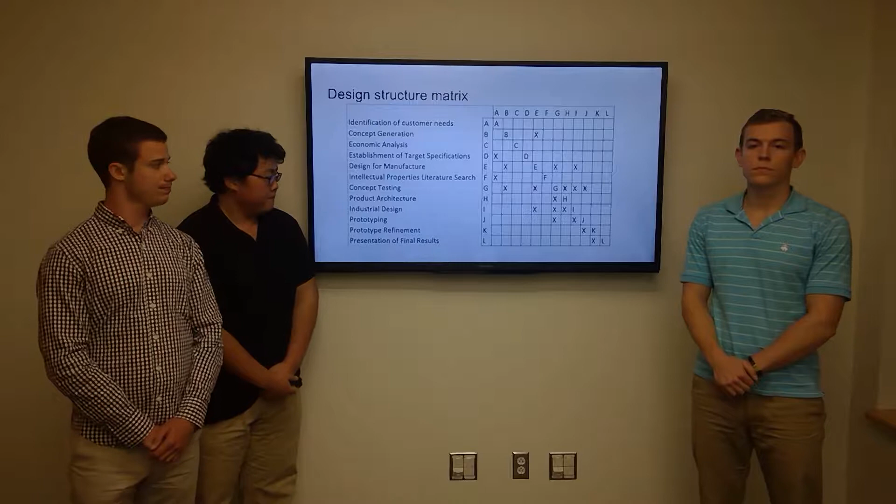And station 2, we got the idea to create sort of like a Plinko machine. And none of these ideas had any legal repercussions because many of the patents had expired already, and the other patents that had not expired yet, we didn't use any ideas from them.

For each station, there were 3 ideas that were generated. The first station, gravitation, had an Arduino-powered fan that would raise a ping pong ball up and down. Magnetic force, where the user would use a magnet to guide a metal ball triggered by the ping pong ball through the course. And then the third and final idea for station 1 was projectile motion, where we would use a catapult to launch it onto the next part of the track.

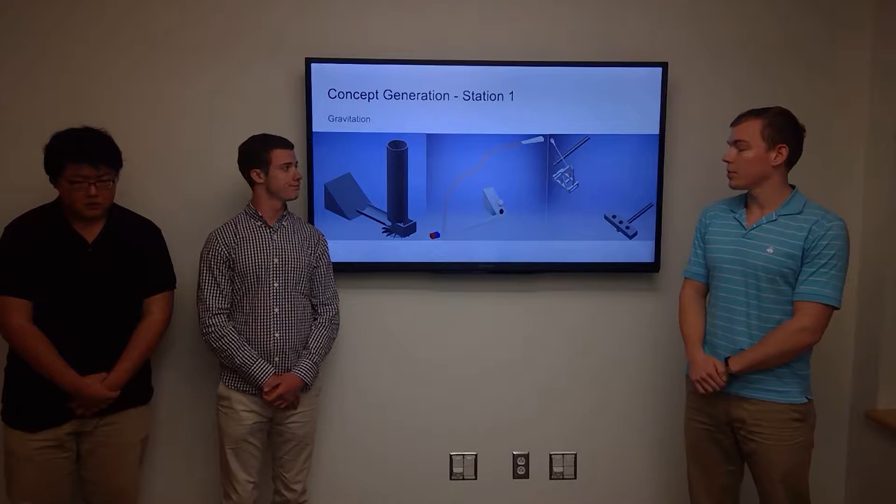The team has decided to pursue magnetic force because it had the most repeatability by the user. So as the metal ball rolls down, the user will actually guide it with the magnet. And if the user pulls too far away, then gravity will win and it will drop the ball and roll back to the starting location.

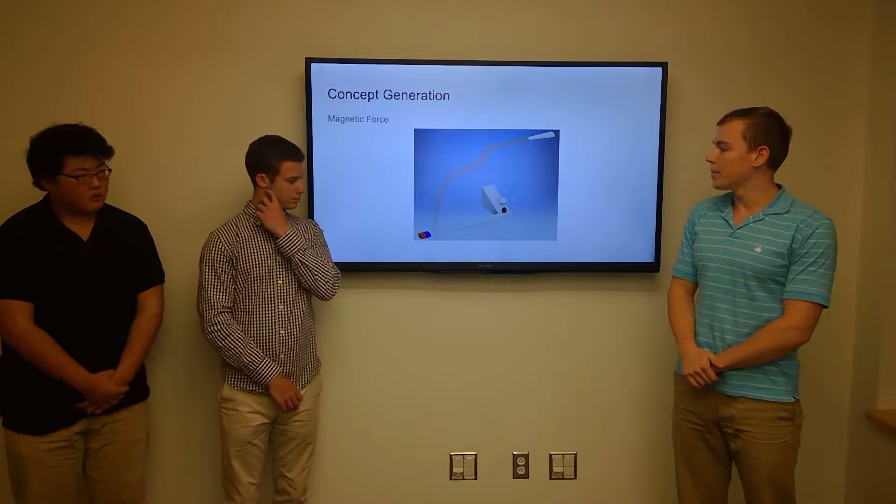We were finding issues, especially with projectile motion, being able to get that repeatability. And this station also offered an additional teaching concept with magnets that we thought was an added bonus to the teachers being able to teach first graders about magnets.

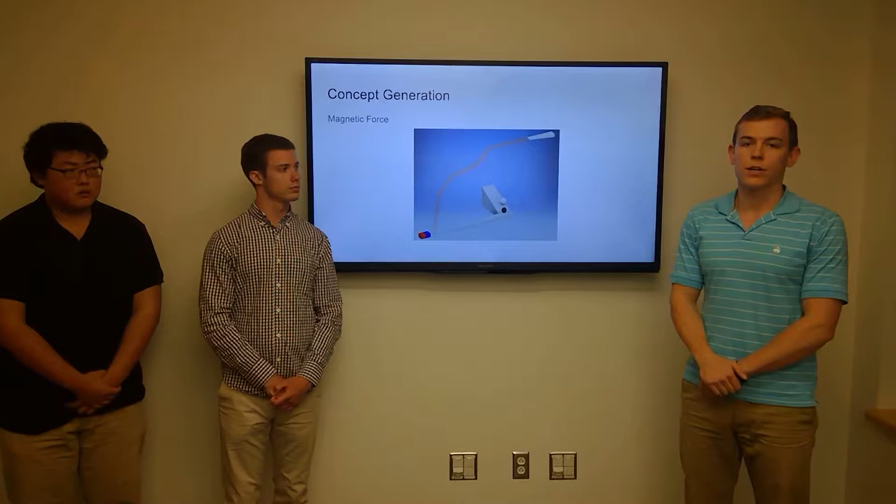For station 2, we were looking at addition. The first idea for this was using Wheel of Fortune, and the second was a pegboard, and then the third and final was a random number generator.

Each idea generated different numbers where the user would then need to add them together, and then the teacher would be able to enter them into the Arduino, and upon getting the correct answer, a gate would open and then the ping pong ball would continue through.

And the first station would get those numbers by the ping pong ball rolling through and spinning around the wheel. The second one would be activated where a lever would pop up, releasing ping pong ball through the pegboard. And then the third one the ping pong ball would roll through, and then as it passed different signals, that would be able to alert the Arduino to generate different numbers for the user to, again, input.

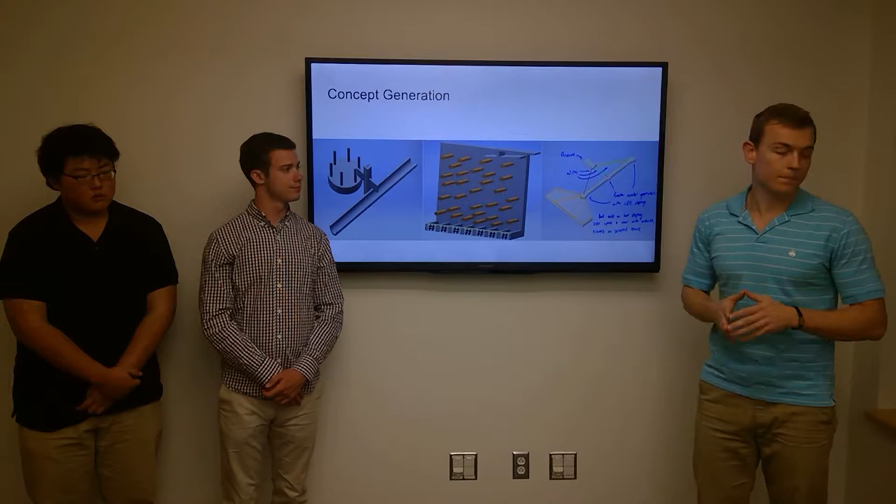The team has decided to pursue the pegboard. This really connected well with our first station. The magnetic ball, as it reached the top of that station, would drop into a 3D part that we'll explain later, and that will raise a lever, releasing those ping pong balls.

And then we just really liked how easy that went with station 1. In addition, it also added a lot of excitement and was aesthetically pleasing to the user, which was great for first graders. It really kept them engaged, and we'll get them excited about this station.

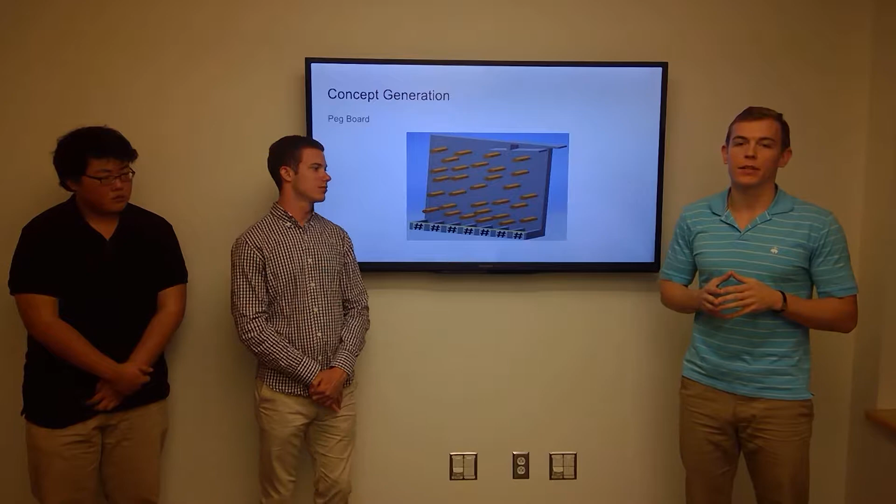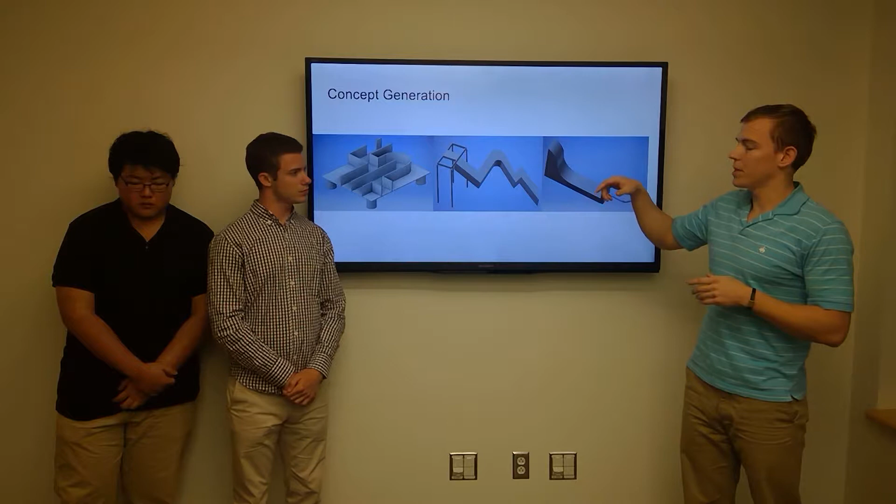For station 3, we were teaching motion, and the 3 ideas was a maze, a ramp, and then a slide. The first idea, the user would be able to pick it up and guide the ball through the maze. The second idea, the ball would be rolling in after station 2 and trace the different types of motion needed

to end the ramp. And then the third idea was the user would blow through a straw and it would raise the ball up, looking at different motion. It was going up and then bending around a ramp as well.

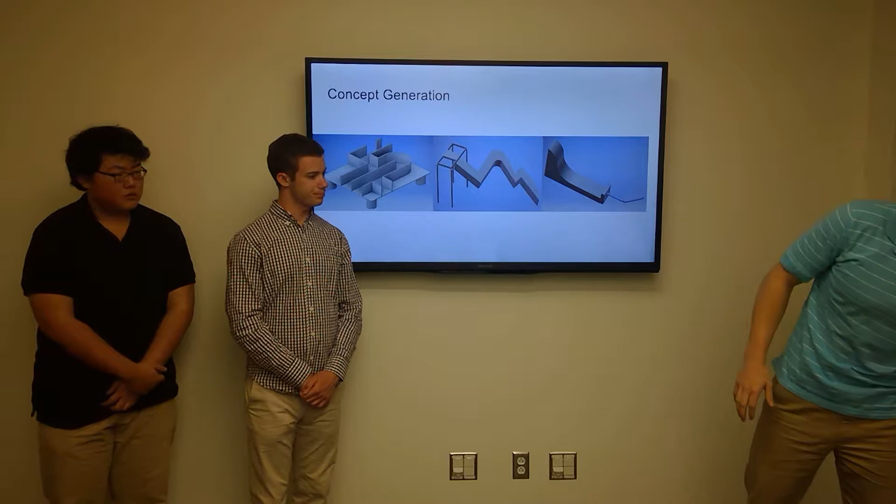The team has decided to combine two of these ideas, both the maze and the ramp. The purpose of this is to add more motion and better teach the concept of different movements and different angles and direction. It also will allow the ping pong ball to reach the desired maximum speed or the desired exit speed for the BRG.

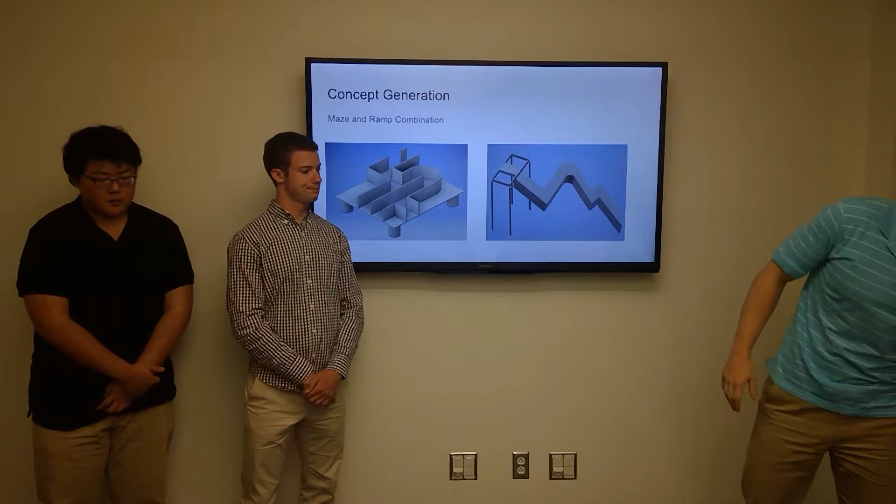We also performed a failure modes and effects analysis on these stations that we built. The only imminent danger is in station 1, where there's a magnetic ball used to go up the ramp. This could pose a slight issue if someone has a pacemaker, since it might have some magnetic interaction with the pacemaker and make it beat off beat. This shouldn't be a huge issue though, since it would be super rare - most people don't have pacemakers, and most pacemakers are designed with a magnetic field that counters anything that might interrupt it.

Another issue is that the Plinko station, which is pretty tall and heavy since it'll be made out of wood, if not set up properly, might fall over, and if someone's hand or fingers are underneath, they could potentially get crushed. But this won't happen if the board is properly set up, so there will be explicit instructions provided with the kit saying to make sure the pegs on the bottom are plugged into the pegboard so it won't be able to slide.

The last thing that could happen with any of the stations or connections is that the ping pong ball might fall off the track, but we've tried to design most of the stations with this in mind and make the walls high enough that even under extreme circumstances, the ball won't be able to fall off.

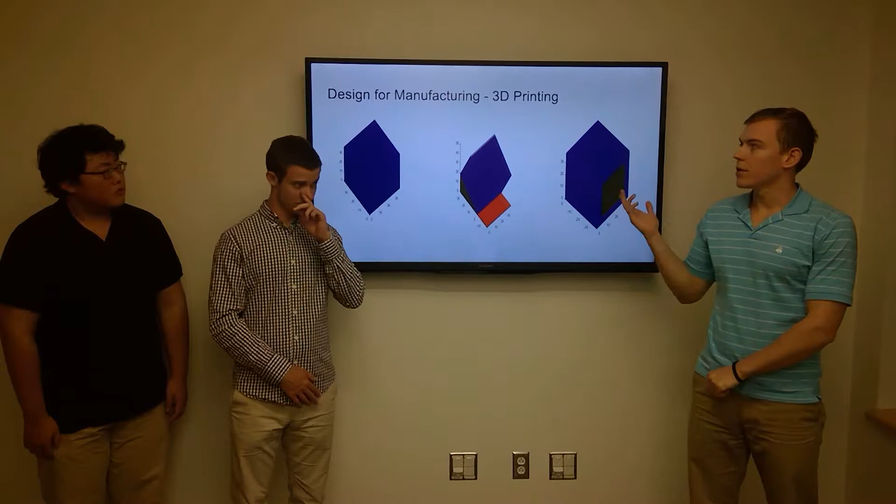For one of the parts of the BRG, we needed to make a part using a 3D printer and manufacture this. So to do the best analysis, we did several different orientations and observed using a MATLAB code the different effects on the amount of material used and support material, as well as the length of time and the cost for this part.

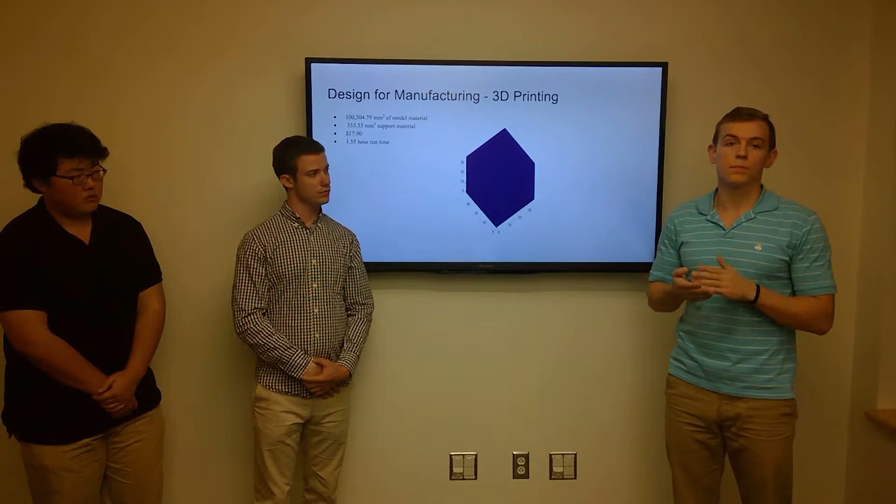We've decided to integrate this for station 2, where the lever part of the pegboard would collect the metal ball, lift up, and then release ping pong balls through the pegboard. It's a pretty simple design, however the dimensions were really small, being about 2 inches. Finding either a metal or wooden box that was durable enough was hard to find, and it was pretty incapable of making a lot of these efficiently, so that's the reason why we decided to pursue this part and make it using the 3-dimensional printer.

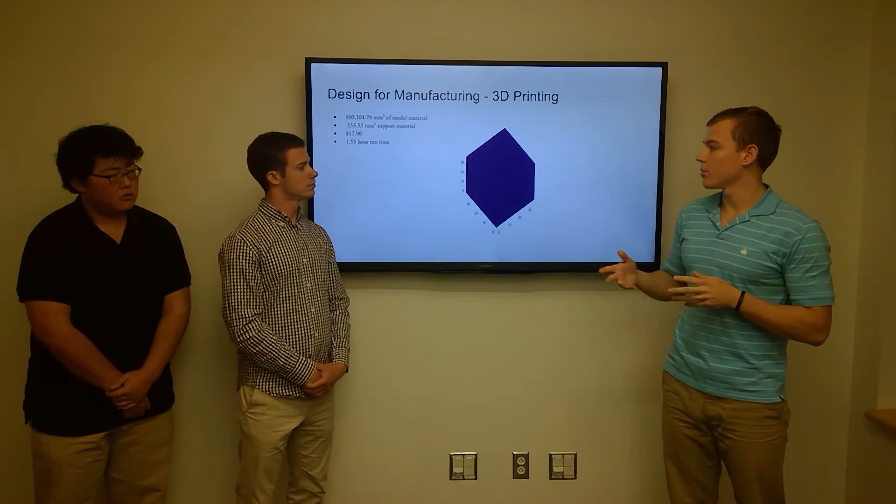With the MATLAB code, we were able to find that it will take about an hour and a half to make, and just shy of $18. It's going to use about 100,000 millimeters cubed of material with a little bit of support material underneath as well.

Our economics for the project is that we would like to request a $15,000 initial investment from VTEPS. This would be used to pay for the tools and materials we'd need to mass produce our BRG. We would pay this back over the course of 4 years at an annual interest rate of 15%, which comes out to 3.75% quarterly.

Based on the economic analysis we did in our first report, we found that our project could make $5,500 per quarter, which is $22,000 annually in pure revenue. So if we're paying off a $15,000 loan at 3.75% quarterly, that comes out to almost $2,800 that we'd be paying back to VTEPS per quarter. If you subtract that from the $5,500 of revenue we'll be getting, you'll get somewhere around $2,700 of profit per quarter for our team.

Over the course of 4 years, this results in VTEPS making $33,200, which is a big step up from their $15,000 investment, making it a worthwhile investment for them. And we'd end up getting just shy of $33,000 as well, so it's profitable for both companies.

In conclusion, our team is on schedule to complete this project by April 28th. Research on patents has been completed, so we're not infringing on anything, and we've done plenty of models and prototypes for each station, so we know how the stations are going to work and what the final is going to look like. We're just working on actually building the final project now.